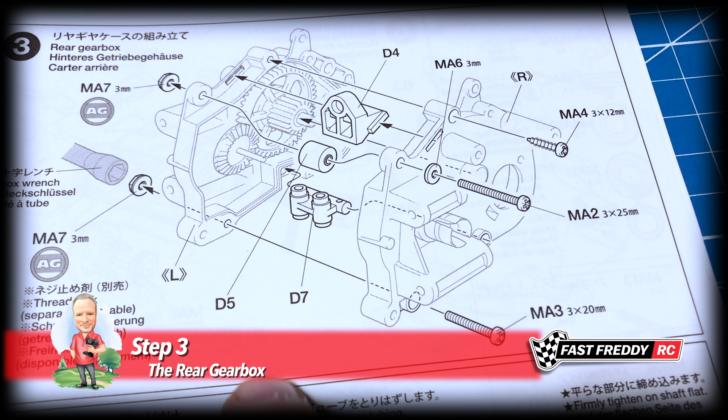So for step 3, the rear gearbox. Well, we need to grab a few things off the parts tree. You've got D4, D5, and D7. We need those because they're going to go into either side of the gearbox when we close it up. And then, of course, we have our screws and our washers.

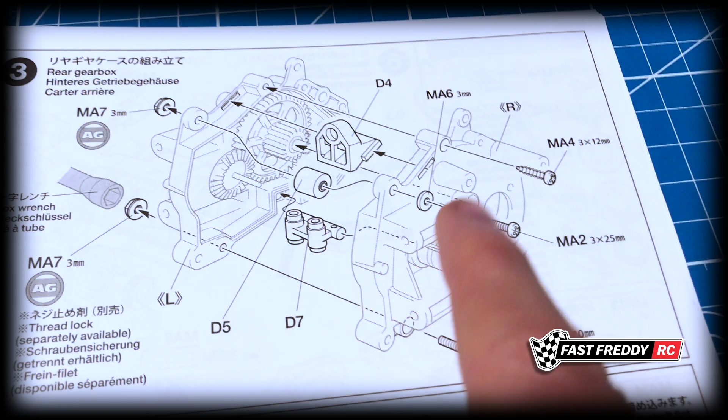Now, that MA6 washer is a bit thicker than a normal washer. And then, of course, there's our parts and our flange nut. But there's one interesting thing.

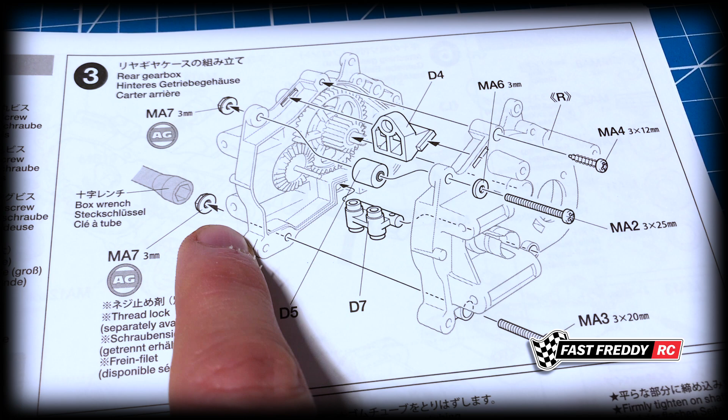It's showing you AG, thread lock, separately available. I'm not going to be doing this because I don't agree with thread lock. I know there are other people that will say no, there are other types. I don't use thread lock. I do not like to be in a situation where if I've locked everything up and then I want to get into it, and you've got thread lock, which will make it a nightmare. I know there's a blue thread lock and a red thread lock, and there is a difference. I just choose not to. So I will just make sure that that's nice and tight.

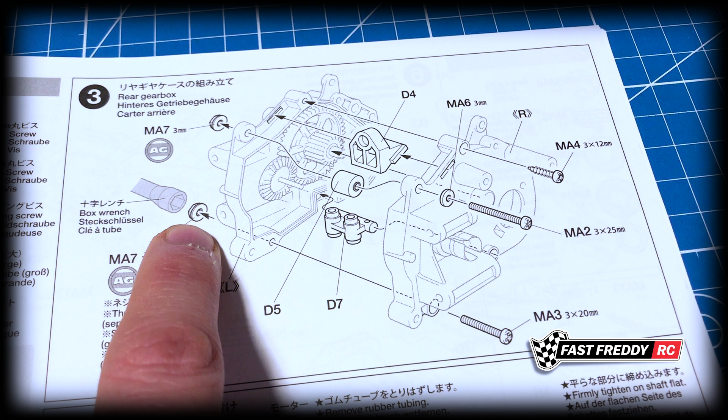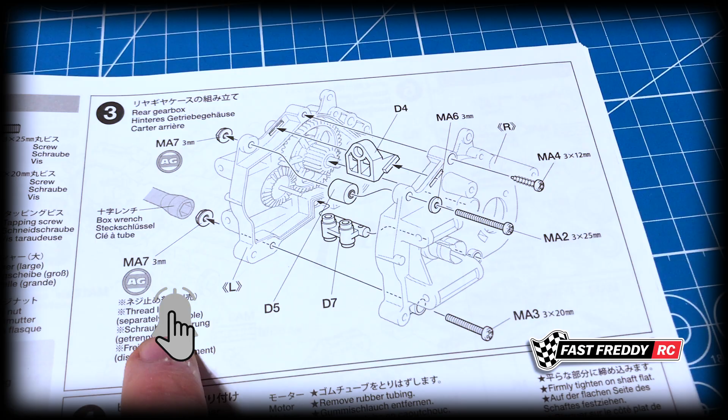The funny thing is, I am also building a Super Saber, and the instructions are identical to this, other than a couple of pieces that look a bit different. But there's no suggestion of thread lock there, and it's the same gearbox. So again, I'm going to be leaving this out. Anyways, I'll set this up and let's put this together.

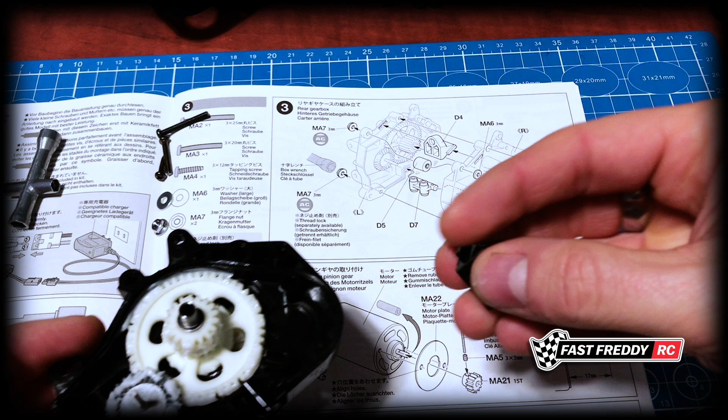So let's grab this side of the gearbox, and you can see that we've got D7, and in terms of the positioning, that's got to go into the hole just like that. So it's going to sit like that. Then you've got this piece here, so that's going to sit there facing forward. Now this will be interesting putting it together, trying to hold all this. And then we have this piece right here, which is going to sit right there between the two gearboxes. Again, this is going to be interesting putting it together. So we have these three pieces, and then this all has to fit together.

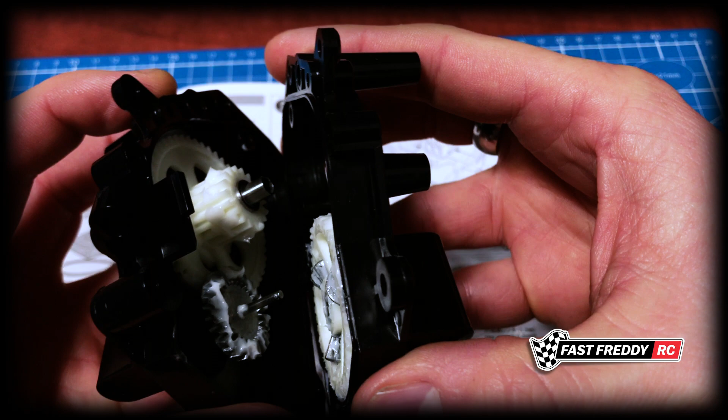So let's do that. We know all this has to go in together somehow. So if I sit this up, I want to make sure that that is going in with the other. Okay, that's fallen out. So we've got to make sure that that stays together. Let's make sure. No. There. Now I'm going to pull that apart again, because we know that's got to go in there, and that's got to go in there. So I'm just going to slowly push this together, making sure that everything's starting to fit. That's not quite right, so we'll lift that up. Go. It's a bit finicky.

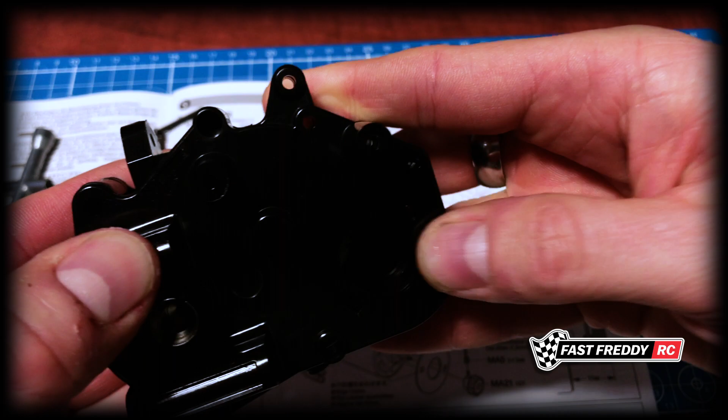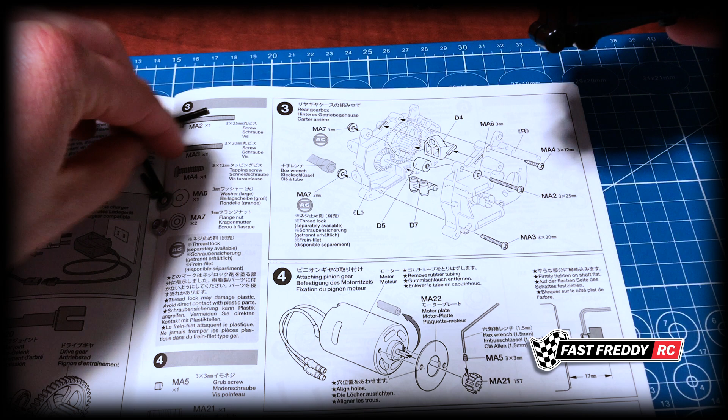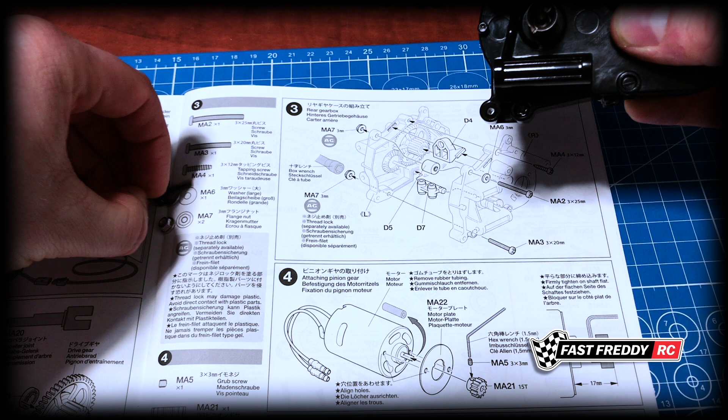So that's got to sit in there, which it will. I just want to make sure everything has gone into place as it's supposed to, because you can hear it clicking around. So this one here, which was the MA3, that's the one that has to go into here, this bottom hole, and come out on the other side, and we're going to use the flange nut for that. That's fine, but first off, this one here, you can see that it's going to be the bigger screw with the washer.

Let's just get that in. Bigger screw with the washer, and it's going to go through that part there that keeps wanting to slide out. So let's just make sure that it's going to go in and through, which it is. And that one is going with a flange nut as well. So we're just going to basically tighten this up a little bit so that it's not coming out, but it gives me something to hold on to while I'm trying to attach everything else.

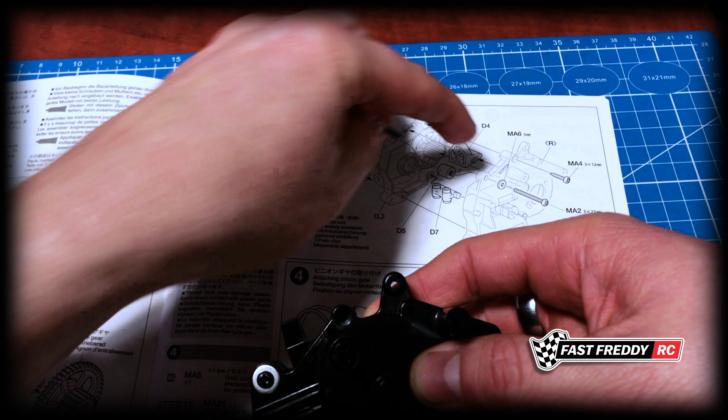And we know that's okay, that's okay. So then we have this one here, which was our tapping screw. And if I see that correctly, that's going to go up here, just like that. I'll start that just so I know it's going in a bit. So we've got this one, we've got this one, and we've got the one at the bottom, which also needs that flange nut. So on this side, we've got our flange nut as well.

Actually, I'm going to hold that while I screw that one in. That's going to pull things together. So ultimately, we need to tighten this one, and tighten that one. So that's what we'll do. Now what's interesting is usually I use the bigger screwdriver, but this one you can't fit the screwdriver into the hole very easily. Okay, so these ones are tight.

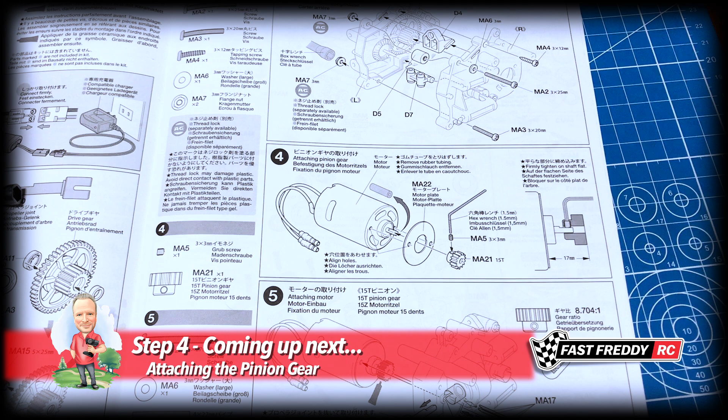But I'm happy with this. Everything seems to be in order. So that means step 3 is complete. So now we're going to move on to step 4 and attach the pinion gear.